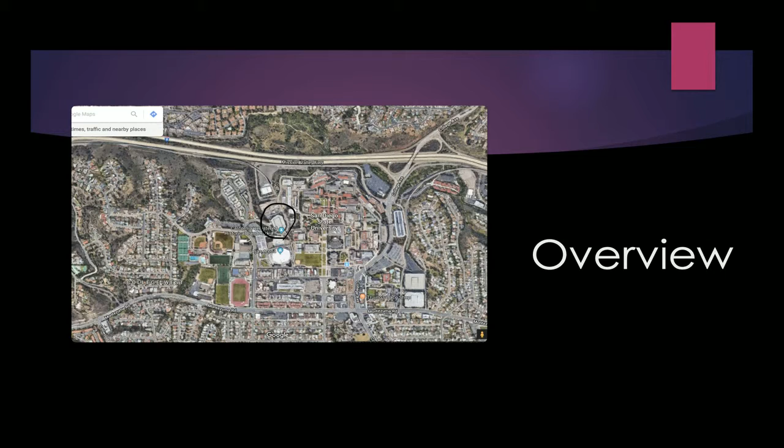Parking structure 4 is located west of campus, north of Viejas Arena. The parking structure is an 8-level parking structure. The structure is a post-tensioned, long-span structure with 24-foot wide bays, 6-inch slabs and 32-inch beams, approximately 22,000 cubic yards of concrete.

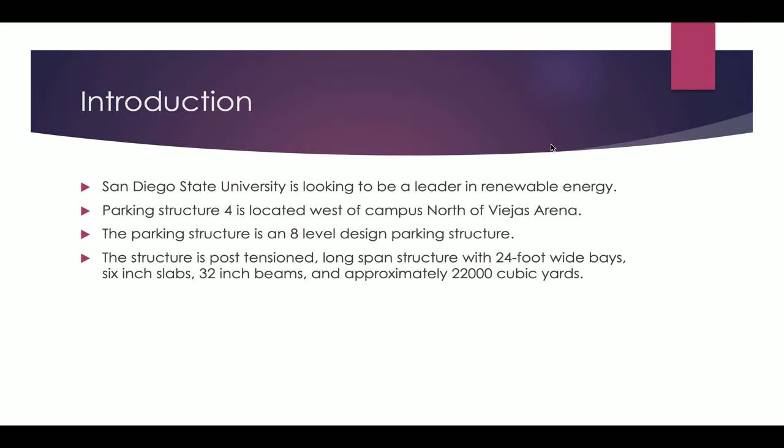Calculations will be made through the SAP 2000 app. Findings: steel has a high strength to weight ratio, which means it has high strength per unit mass. It can be easily fabricated and produced massively. Steel is relatively cheap compared to other building materials.

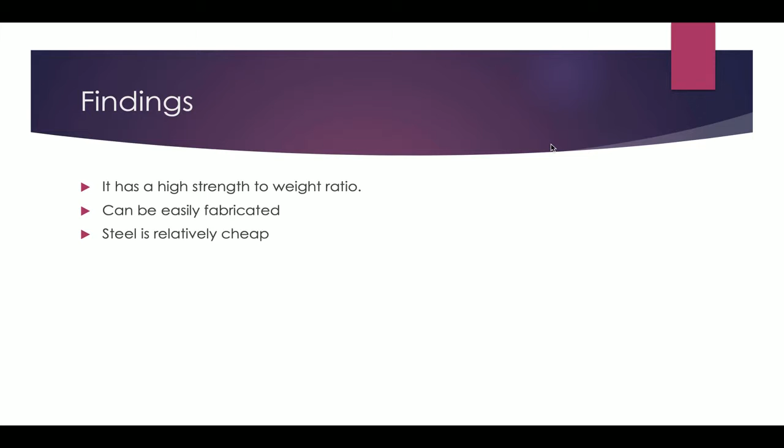The safety of the existing reinforced concrete building will depend on the initial structural configuration of the total building and can be checked by field tests to check the strength of concrete elements.

I'm Mohammed Al-Abbad and I'll be talking about the steel structure. The purpose of this section is to make analysis and design of the steel structure due to different types of loads. The types of loads are dead load, which is the non-dynamic, invariable forces that place continuous and permanent force on a structure. We calculated the weight of the solar panel and load of the steel structure.

The live load is the variable load that can change over time, such as people walking around a building or movable objects such as furniture. The seismic load is the external force applied to a building structure as a result of an earthquake-generated agitation. The wind loads are dynamic loads that are placed on the exterior of a structure by wind.

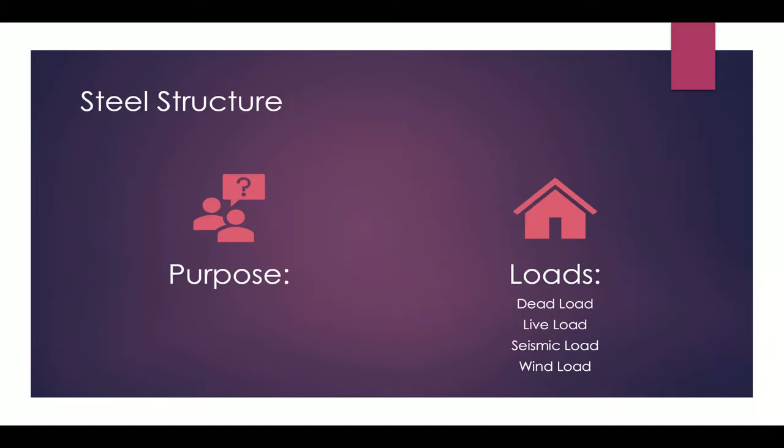The codes and standards we used are ASCE 7-10 and AISC 358-10. By following these codes, we came up with the proper design properties that helped us calculate each applied load as shown in the project design file. These properties helped narrow down the equations required by code to find inputs and outputs of each load. After coming up with certain calculations, those numbers are then used to get the desired design criteria.

My name is Ali Al-Ajmi. I will be talking about design of columns. For the columns we used column section W18x158, the axial service load 120 kips, and the column yield stress Fy we used 50 ksi. The unbraced column length is 10 feet. We calculated the local buckling limitation and the compression capacity.

My name is Ahmad. I'm going to be talking about the design of beam sections. So for the design of the beams, we went with the beam section W12x136. For the gravity distributed load, W was equal to 1.01 kips per foot. For Lb, Lx, and Ly, all three were equal to 6.67 feet.

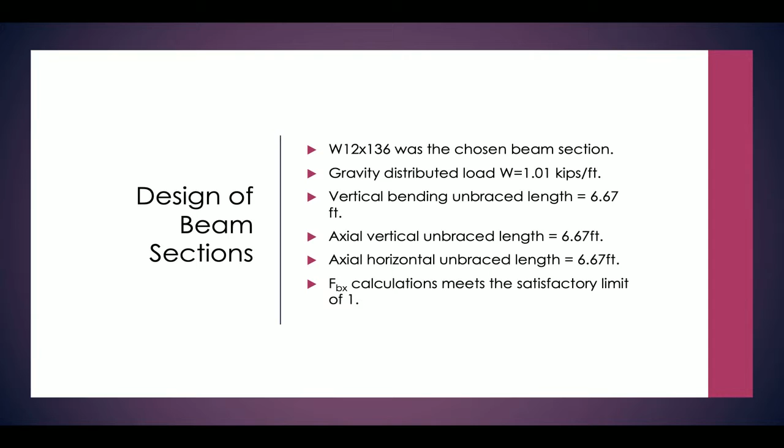Now, I will be talking about design of purlins. For the design of purlins, we went for W8x40. The gravity distributed load is 0.08 kips per foot. Axial load is 0 kips. Beam length is 24 feet.

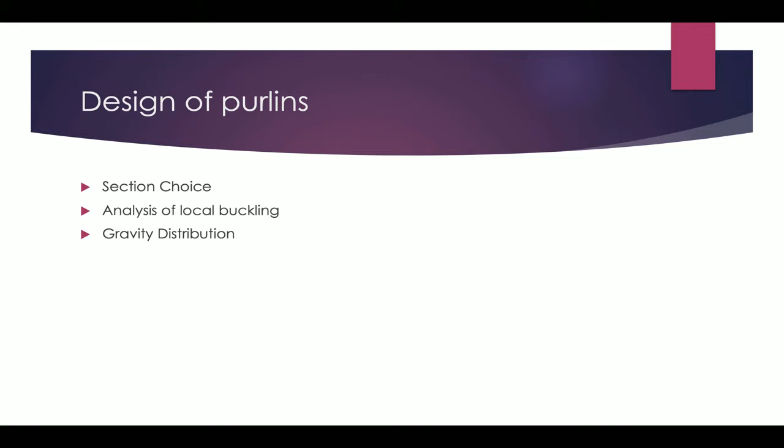We made analysis of local buckling, determined governing moments at middle of span, allowable bending stresses, vertical flexural capacity, and compression capacity. For the bracing, we used a pipe with brace axial load of 4.39 kips. The brace design is adequate.

And for the base connection, masonry strength of 1.5 ksi. Anchorage rebars of number 3 bars at middle of the wall. Base plate yield stress of 36 ksi. The anchorage design is adequate.

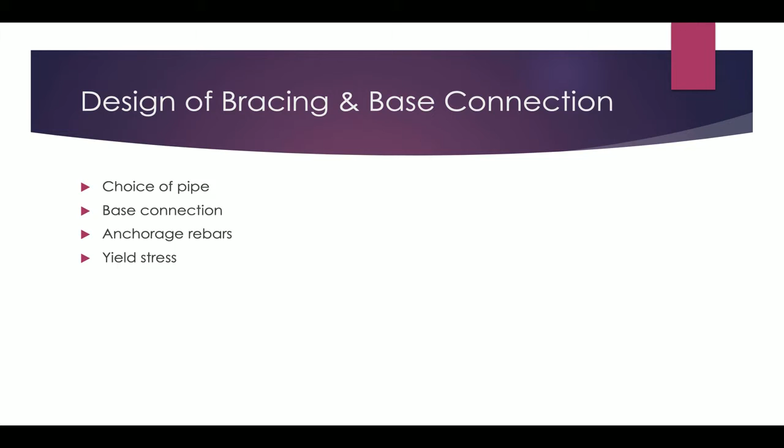Next, I'll be talking about the concrete structural design. The purpose of this section is to make design of concrete columns structure due to the applied loads, due to the steel structure that supports on the concrete column, which is subjected to this reaction of supports designed as fixed.

The codes and standards used were ACI 318-14. The assumptions and criteria we came up with was the base of the steel column that is fixed, and the concrete grade which was 4.2 KSI. The section is subjected to combined normal force and bending moments.

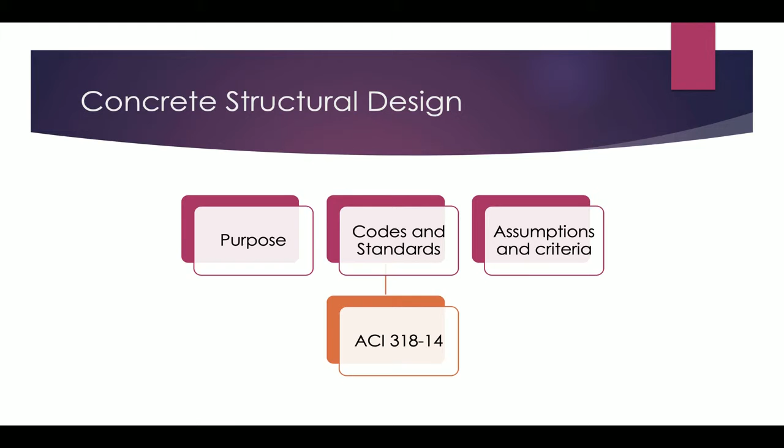For the concrete columns, we have to do checks to make sure it will hold the steel structure without failure. The concrete strength is 4.2 KSI, the rebar yield stress is 60 KSI, and the column dimensions are CX 30 inch and CY 30 inch. The factored axial load is 29 K.

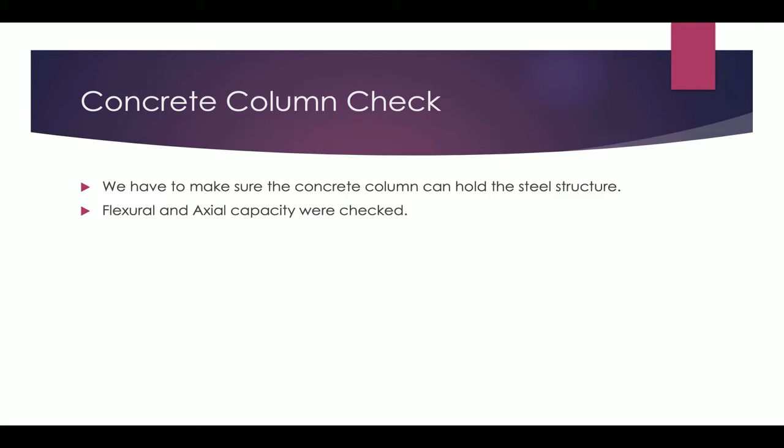Construction work usually consists of the methods or ways one can use in order to achieve access to the site. Here we will discuss how the construction site will be accessed in order to transport the material and equipment. For any project in the world, depending on the conditions of the site, access has to be achieved in order to make the construction work easier and less expensive.

For instance, if we decide to use a crane to transport our equipment, we will have to pay extra money for the crane, operators, and street closure.

One of the most advantages of our project is that it is on the top level of an existing structure. This can help narrow down the ways we can transport our materials. Since our project is to design a steel structure, it would be easier to transport such materials by trucks due to the light weight of the steel.

We have decided to transport our materials to the roof level and keep the parking structure operational during the day, except the construction site level. It is found that moving the materials after 12 a.m., after midnight, is preferable in order to have low traffic movement.

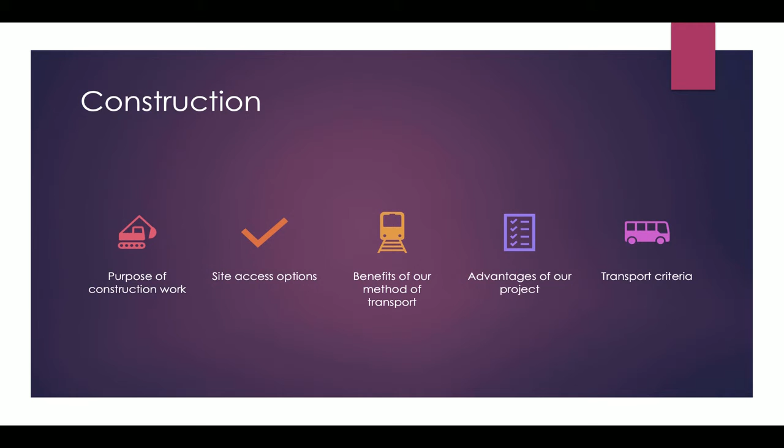For the design summary, we will fix the anchor bolt at the exact location of steel columns in the concrete columns. Then we will supply concrete columns with attached base plates and fix it with anchor bolts. Third, we will join the columns together by steel beams.

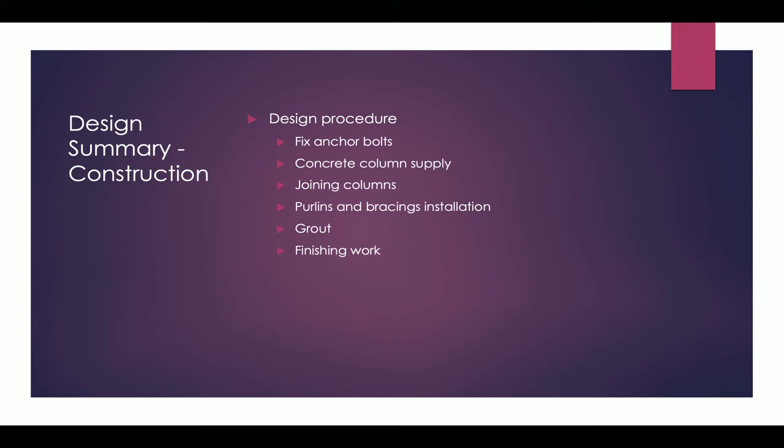Fourth, we will install the purlins and bracings of the structure. Fifth, we will pour self-leveling grout under the column base plate. And finally, we will fix the solar panels and necessary electrical, sanitary, and architectural works.

In regards of the costing, we have the cost of steel columns. After calculating all the cost, we broke the cost down as following. Since we have 433.86 tons of steel required, the material price came out to $238,623. As far as equipment and labor, that's 10% of the total price.

After calculating that, it would be $23,862.8. The overhead is another 10%, that's another $23,862.8. Taxes and profit was 30%, which calculates out to $71,586.9. So finally, the total price of the project would be $357,934.5.

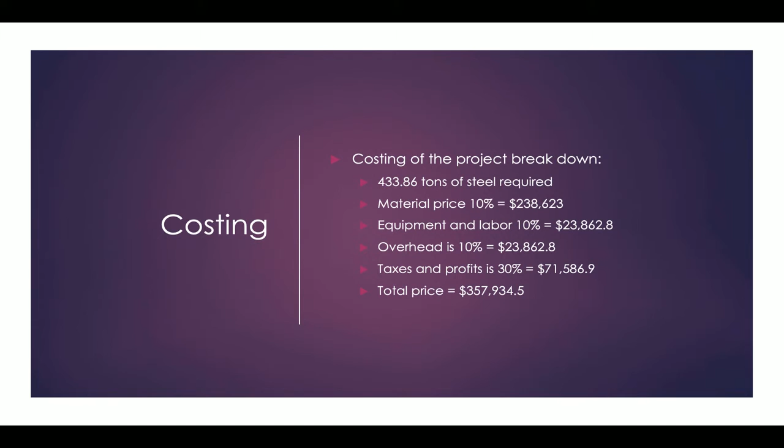Our building site is a very good site that has a large area that's easy to transport to. Our site design integrates with sustainable design to reach a successful project, and this begins with good site selection. For our energy use, we use renewable energy like solar panels that help reduce impact to the environment and reduce the need for non-renewable resources of energy.

We tend to help protect the environment by having a sustainable building that uses air efficiently so that the clean energy source reduces pollution. Our sustainable building is designed to use and reuse materials in the most productive, low-cost, and clean way towards the environment.

Our structure is sustainable because it has high strength, long spans, accurate detailing, uniform quality, cost-effectiveness, and more. Our building can be sustained by following environmental quality standards to ensure a sustainable building that maximizes daylight, and our panels allow maximum daylight due to solar panel arrangements that allow daylight to enter the parking structure, reducing energy used during the day.

Our design specifies materials, steel frames, and systems, with an electric source of solar panels that simplify and reduce maintenance requirements, toxic chemicals, and cleaners. Those are cost-effective at long-term life cycle costs. The sustainable part of our project is that we have the least effective contamination, cost of energy, cost of material, cost of maintenance, and cost of operation.